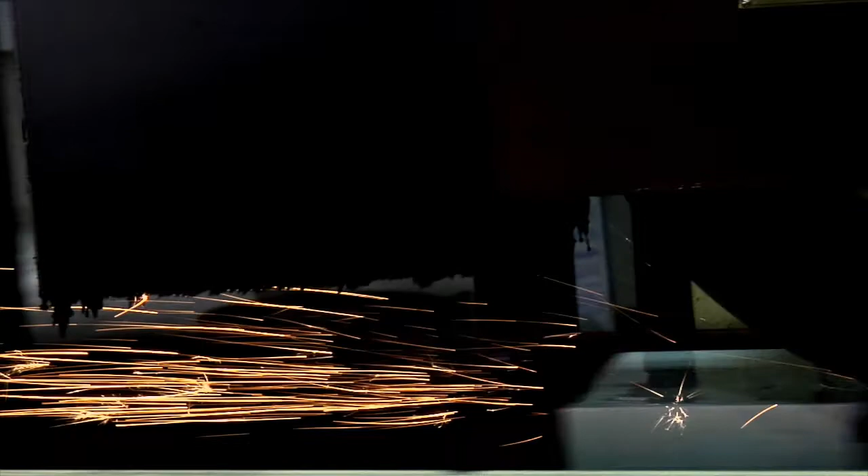U.S. Ordnance specializes in producing new, enhanced versions of the mature, combat-proven Mark 43 and M2, making and testing them according to U.S. military technical specifications and instructions. Only U.S. Ordnance manufactures and distributes the Mark 43.

The company's primary weapon systems are the M2HB QCB, the Mark 43, the M60D Enhanced, and the M4 M203, all of which are NATO sanctioned. It sells these to governmental agencies in the U.S., including law enforcement and the military, and to federally approved foreign governments and militaries. It also facilitates training for its products.

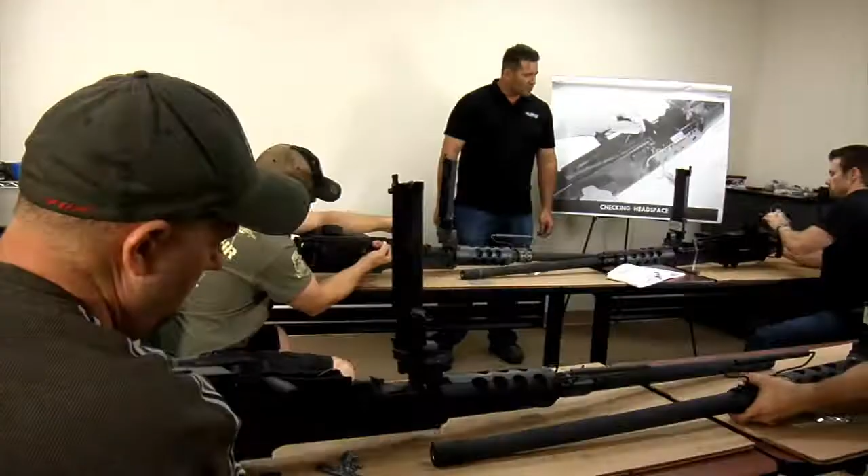On the U.S. Ordnance team, you'll find experienced engineers, manufacturing personnel, armorers, and support staff who work together to deliver exceptional products and service. Workers practice the company's strict code of ethics and commitment to integrity and excellence. They afford all potential and existing clients the same first-rate level of personal attention and responsiveness.

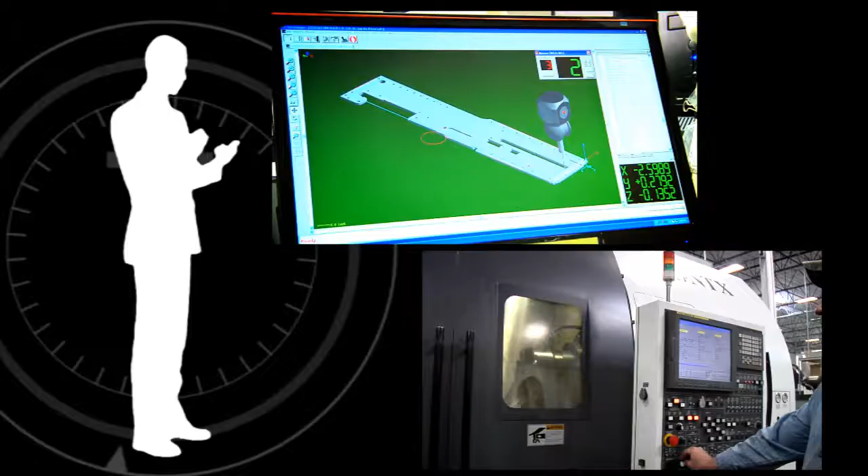A U.S. government representative is on site to witness and verify specific procedures in the production and testing of the weapons and ensure all the required standards are met. All the products that U.S. Ordnance develops are per NATO specifications.

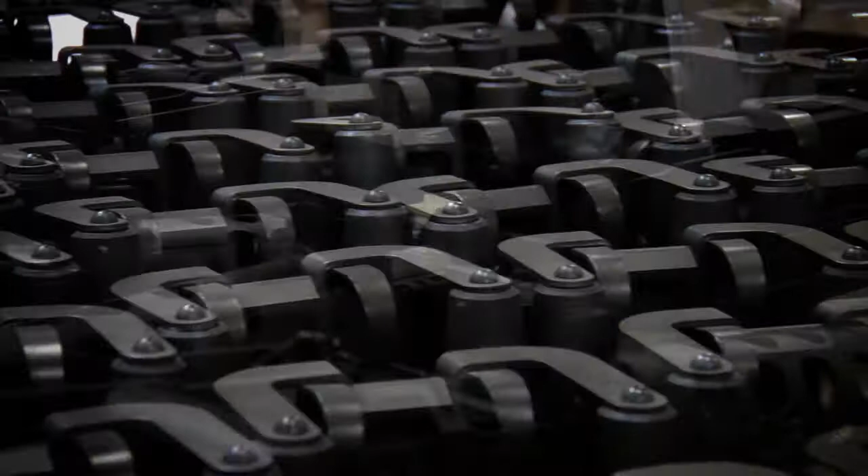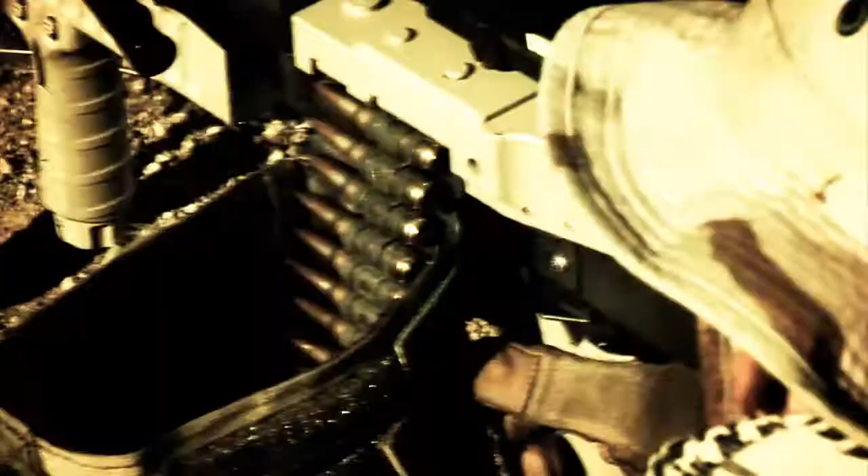The company's engineers, CNC machinists, and armorers are devoted to constantly improving U.S. Ordnance's weapon systems to better serve the law enforcement and military personnel using them. Based on feedback from its customers, the company routinely designs new parts, modifies existing ones, or develops new products, whatever it takes to deliver the most reliable and modern weapon systems.

The company strives to ensure that all its Mark 43 and M2 improvements are backwards compatible and that its M2 spares and components interchange with those of other manufacturers. U.S. Ordnance research and development personnel put the company's weapon systems through drop testing and environmental testing, like mud, ice, heat, and water immersion, to ensure they will continue to perform even in the harshest environments.

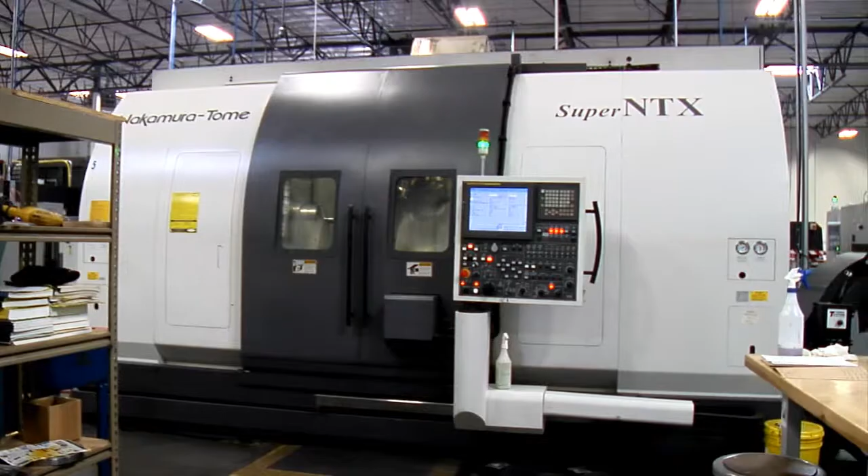U.S. Ordnance has specialized equipment on site for the various processes involved in manufacturing and testing weapon systems. All of it is ISO 9001-2008 certified and delivers enhanced performance and productivity.

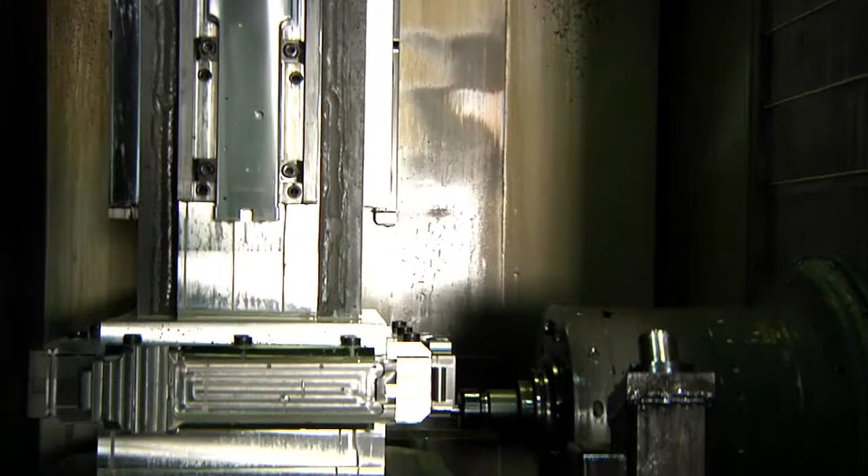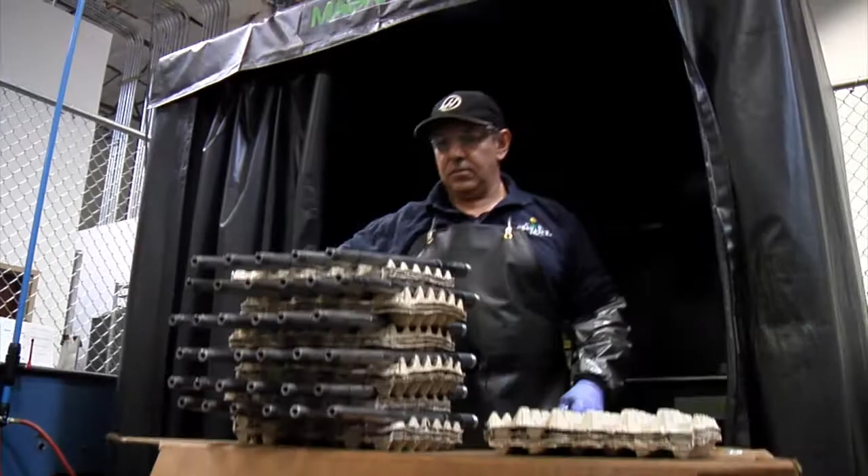For instance, it has state-of-the-art CNC machining centers and screw machines, which are used to machine the various parts that make up each weapon. Other machinery includes high-capacity barrel production and mil-spec plating equipment. The company also uses a magnetic particle inspection machine for detecting surface and subsurface irregularities in the metal of its weapons.

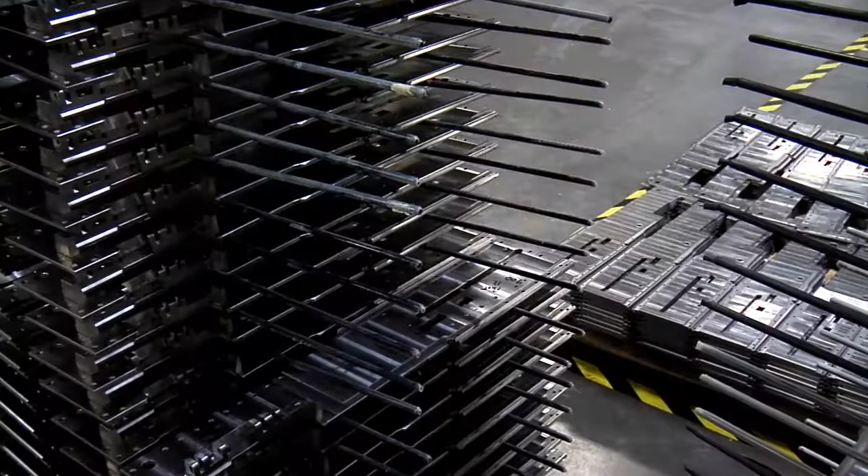U.S. Ordnance's ISO 9001-2008 inventory control and storage process guarantees that only approved components and materials are used on our weapon systems.

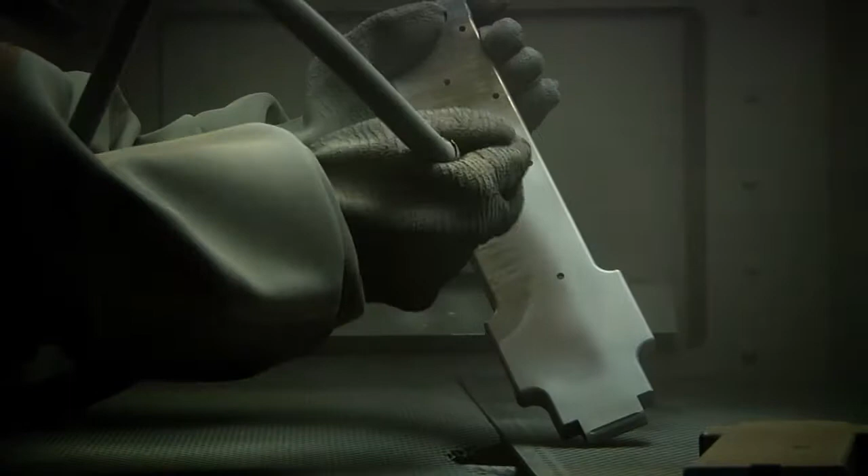After the weapons are machined, U.S. Ordnance media blasts them to smooth and remove contaminants from their surfaces. This process prepares their surfaces for a protective coating.

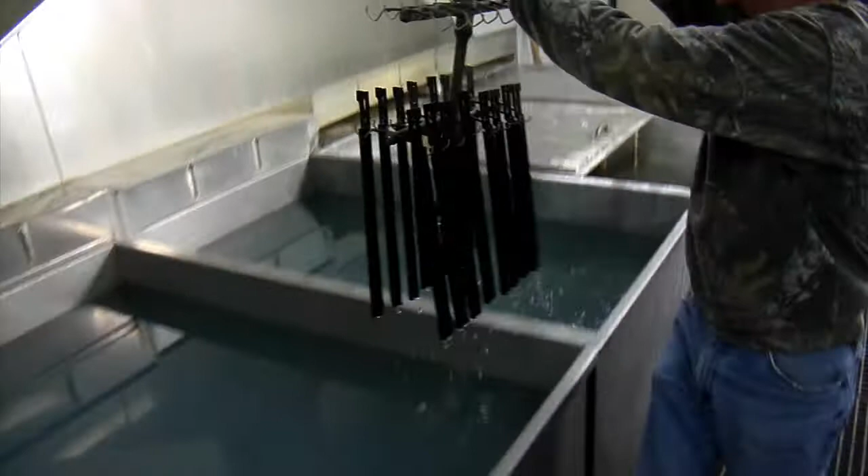At this stage, several proprietary surface treatments are applied to key components to inhibit wear and resist corrosion. Finished components are phosphated in-house using a U.S. government-certified mil-spec process. It involves application of manganese, which protects the steel surfaces from corrosion.

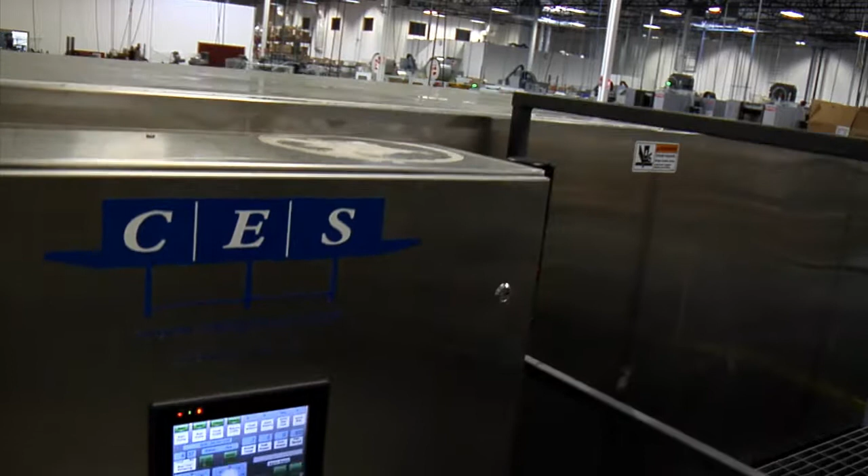U.S. Ordnance also puts its weapons through a cold treatment. Cryogenic processing is an ultra-low temperature processing of materials to enhance their desired metallurgical and structural properties.

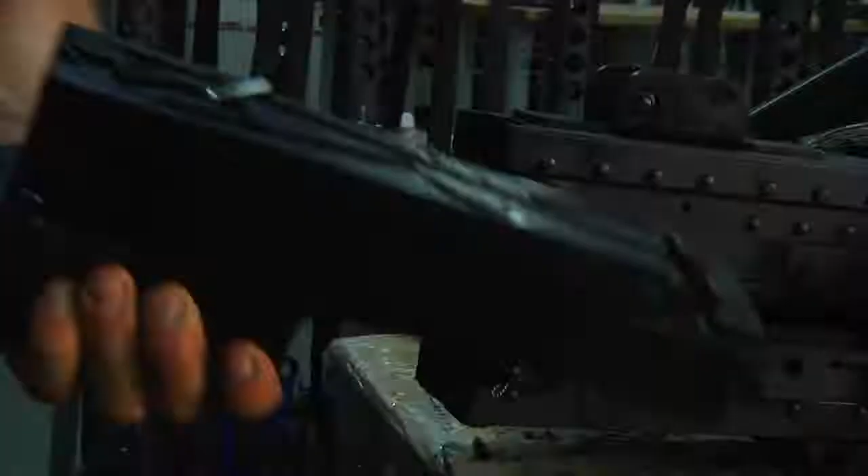U.S. Ordnance workers are highly skilled and undergo an intensive training program. They assemble and complete 100% of the company's weapon systems in-house. All U.S. Ordnance packaging conforms to military preservation, packing, and marking requirements of the current mil standards. UID and RFID marking are available as required.

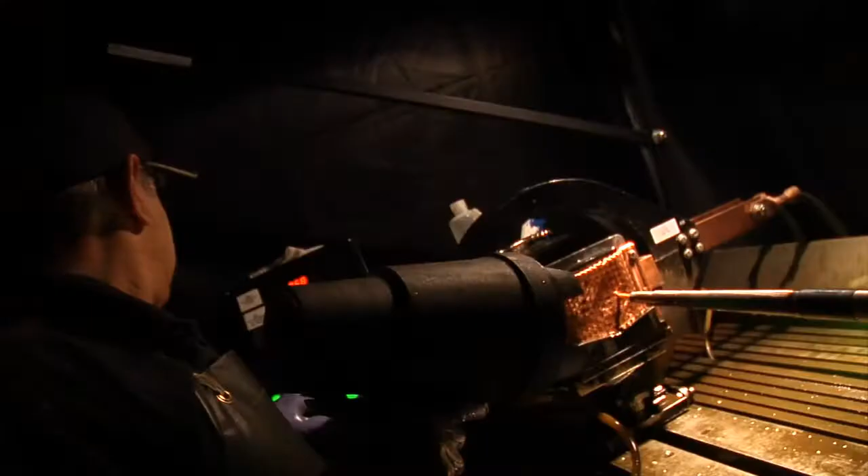Once guns are assembled, U.S. Ordnance comprehensively tests them to ensure the reliability and quality its products are known for. Each weapon undergoes high-pressure testing and magnetic particle inspection. Conveniently, the company has an on-site shooting range where it proof-fires every weapon for functionality and accuracy.

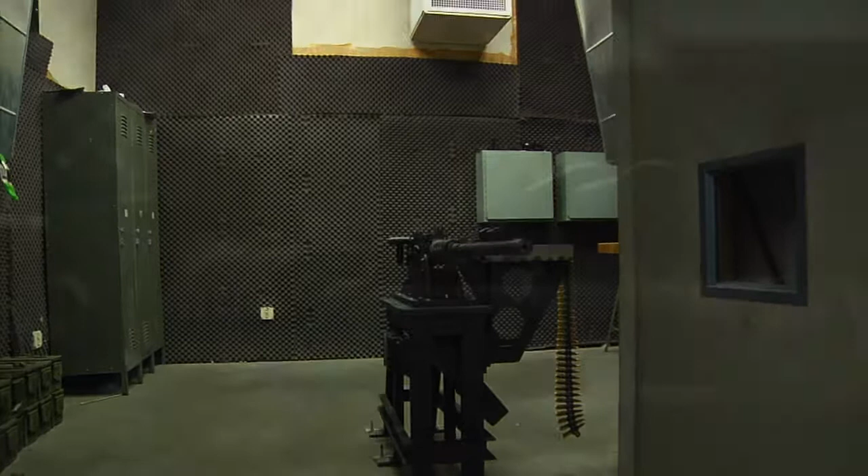With all this testing, you can be confident that your U.S. Ordnance weapon will be ready when you need it most. At U.S. Ordnance, quality control is never compromised.

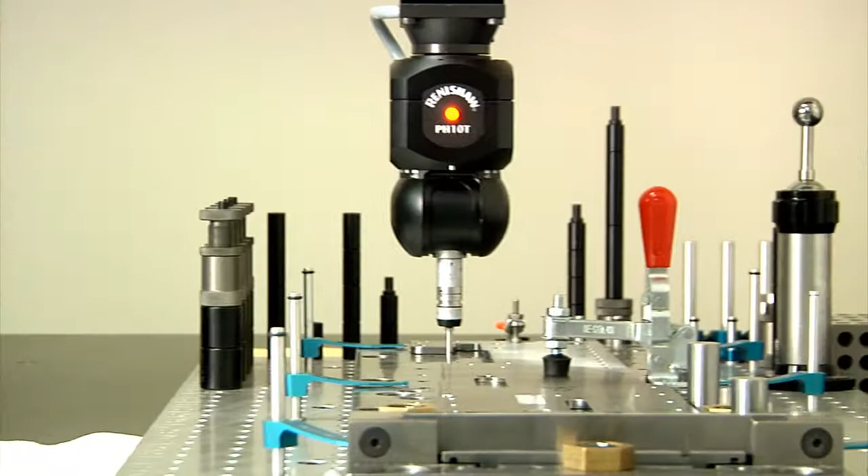The quality assurance team checks all materials and parts. They inspect the material certifications, heat treat and test reports, and also perform dimensional testing on all the parts to ensure they comply with the technical drawings. Each weapon has a unique serial number, which means all the raw materials that went into making each one can be traced to their origins.

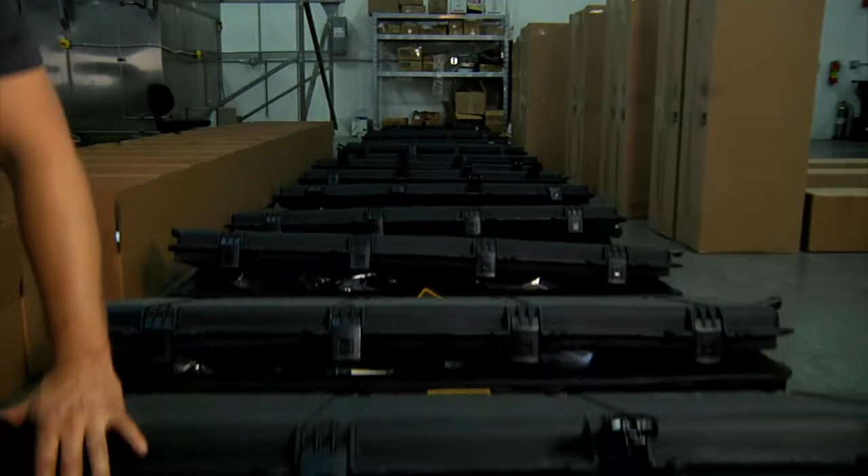Once a weapon system is completed, tested, and receives final quality assurance approval, it is packaged, labeled, and marked according to the current mil standard. U.S. Ordnance: inventive, responsive, accountable.